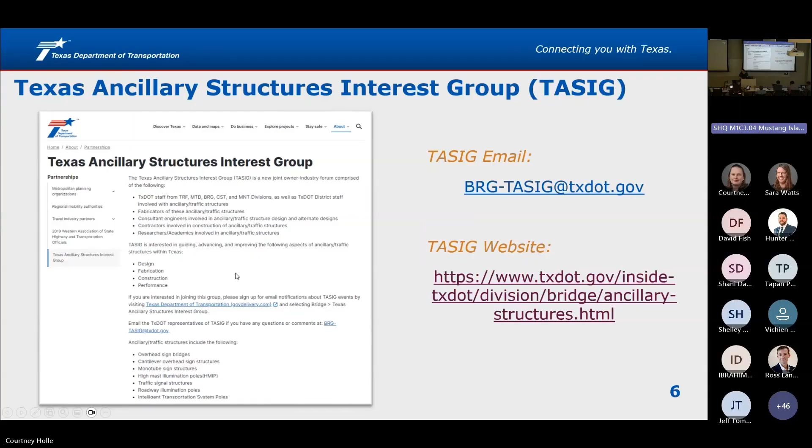Again, welcoming you, giving you some updates on where we are. We're going to go over research project updates - there was a lot of interest in that last year. I think seeing an annual progression of where we are and what we're looking at helps the industry as a whole.

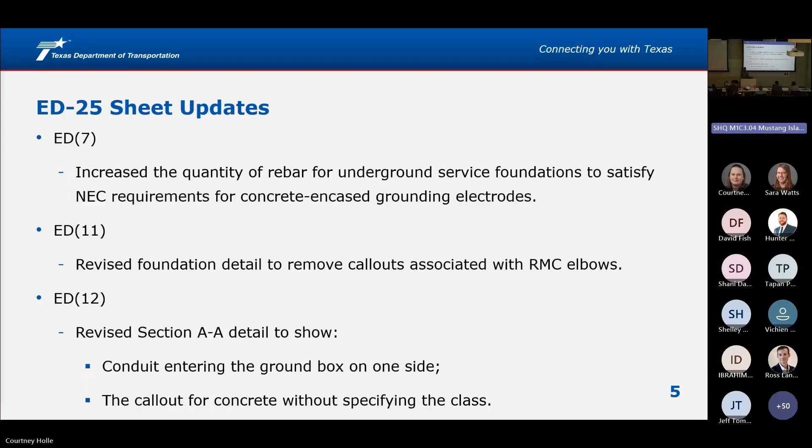There was one other minor update on the HMID sheets. Those sheets came out in 2024, so we gave an update to that last year. We had to basically put back what was in the HMIDs from '03—we had revised a weld in detail G.

Here's the whole sheet. I'm going to zoom into what we changed. On top it shows the detail, and I don't know what these welding symbols mean, but we moved the little arrow from the top to the bottom—correct, so we moved it back to what we had in '03.

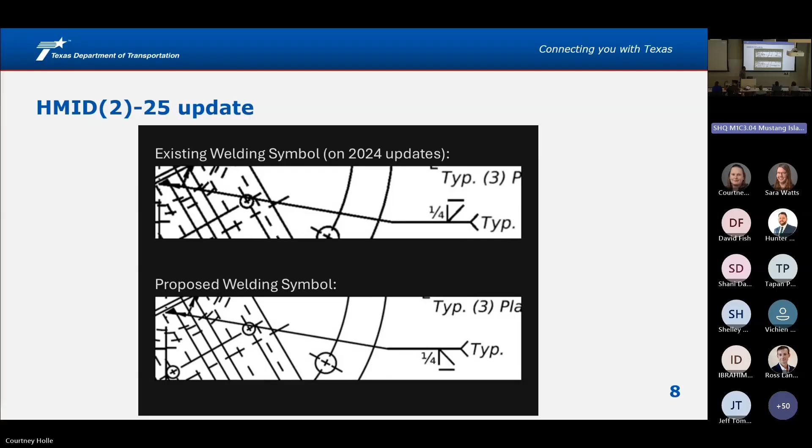And that's all the updates that I have, and then Greg's going to come give an update. Okay, so now we're going to go into bridges. These slides are going to look extremely familiar—they're the same slides from last year. We have made a lot of progress in developing some of these. What we have here is upcoming design specifications.

But standards take a lot of effort from a lot of different people. We go through a lot of different reviews because once we post them, we want to make sure that everyone's had time to look at it, comment on them, and there's been discussions. We don't want to put something out there that's going to surprise the industry, let's put it that way.

So you will see that some of our standards are still to the luminaire traffic signal signs support specification, otherwise known as LTS, the third edition, which is from 1994. The HMIPs were updated for fatigue details and stuff like that, but we're formally through the design process, through the checking, we're at the sheets. So we're addressing the red lines and then internal review, and then it'll go out for industry review.

And it'll be industry review, 95%, take two. So they were sent out and then we got feedback from the industry, and it took us some time to incorporate that feedback. So we are on our way there.

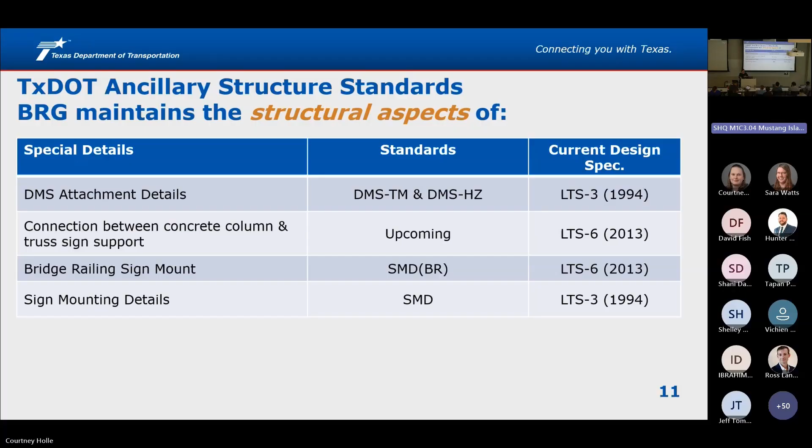So that kind of gives you an idea of where we are, where we're going as far as our standards are concerned. And then with that, I will pass it off to Mark for maintenance slides.

Okay, good morning, everyone. Yeah, Mark Johnson. I'm out of the maintenance division here at this campus.

I work with MMS data. If you're not familiar, basically we take in data for all the activities we do in maintenance, both through in-house crews, TxDOT folks with the orange shirts on, and through routine maintenance contracts. We try to consolidate that data.

We really put in significant efforts to QC that data every year so we can come back and say exactly how much money is being spent on various different activities, as well as quantities of activities, whether it's how many trees we've cut down or how many potholes we patched or how many bridge joints that we have sealed, all those types of things. We try to really put in a lot of effort to get that data to be correct.

So I want to show you a few things from the side of maintenance, since this topic always comes up. Talk a little bit about what our data shows in terms of structures and also in terms of our budget. So these numbers at the bottom, when you see 732, 742, like when I came up through the agency, I was very familiar with the TxDOT spec book.

Then I came to maintenance and found out that they have a whole different system of tracking these activities, which was largely confusing. My first thought was, only the government could make this complicated. But these are actual numbers that we use in maintenance for tracking activities. There's thousands of spec items and bid codes.

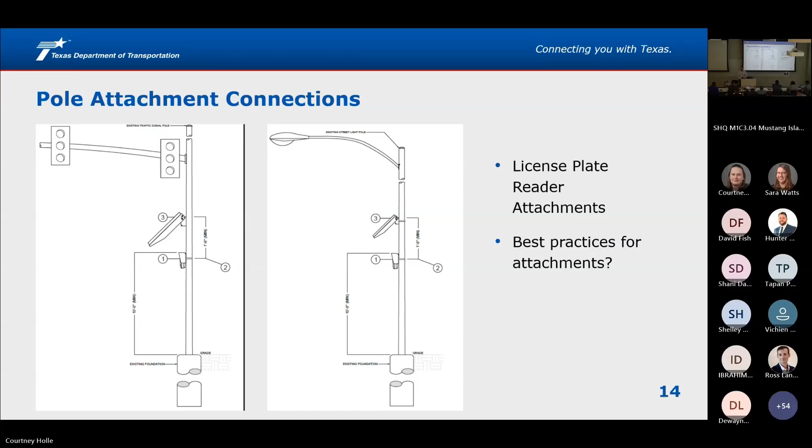All right, my name is Greg Jones. I'm with the Traffic Division, in the Traffic Engineering section - I handle lighting and electrical things. And also I'm the project manager for a consultant contract, a statewide contract to inventory and inspect ancillary structures. It's a 5-year contract.

We started this back in 2020, and at the time we had no statewide records of large traffic structures. We have all these structures, but we didn't know where they were, how many we had, or what condition they were in. So in 2020 we got a contract with Michael Baker International for inventory, inspection, and creating a database. They've gone out and inventoried structures with LiDAR, and they can get a lot of good information with the LiDAR - heights, number of sides, all kinds of stuff.

And then they're inspecting the ancillary structures, and just due to costs, we've been inspecting only a sampling of structures. We don't have the funds to inspect everything, but we're getting a good idea of what's out there, and putting everything in an ArcGIS database. The contract is set up so we can inspect high mast poles, overhead sign structures, ITS poles, and signals. For this contract, we focused on high mast poles and overhead sign structures.

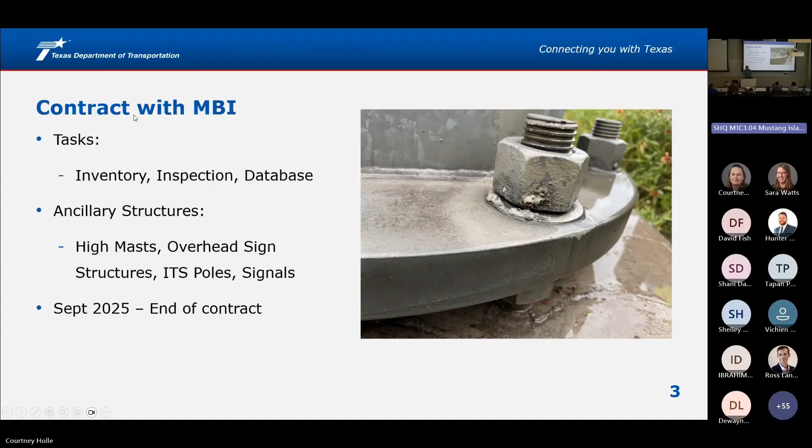It's a 5-year contract, and the end of the contract is just next month, so we're pretty much at the point of getting our final data into the database. For the high mast poles, this year we completed our high mast inventory. We don't have the data for those central West Texas districts posted yet, but overall we have over 6,000 high mast poles, and through our inspection we inspected about a fourth of those.

Overhead sign structures - let me see. Oops, what happened? Here we go. Yeah, I like that video. So in 2022, that sign on US 75 in North Texas fell over, and it was a base plate weld failure.

So MTD division got on that, and they set up an in-house inspection of anchor bolts of cantilever overhead sign structures. Basically it was all TxDOT inspections, and they were just supposed to count how many had loose nuts on them. They also got with us, and we added overhead sign structures to our inventory and inspection, focusing on Fort Worth and Dallas districts, since that's where we had those failures.

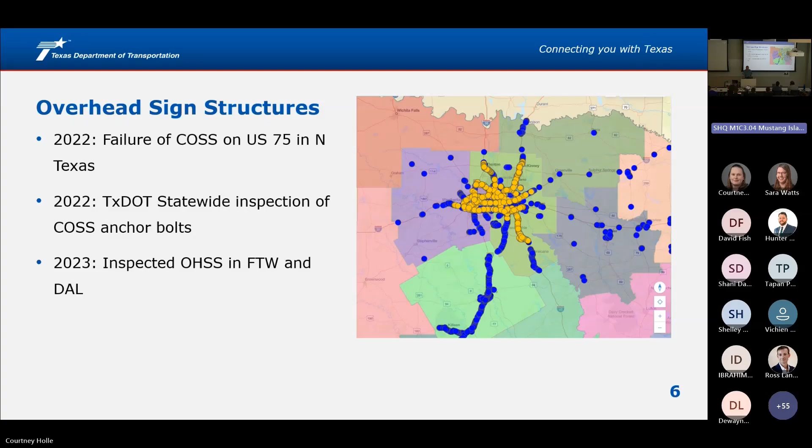Then in 2024 we completed our statewide inventory of overhead sign structures - we still need to fill in some data, but we have most of it. Houston data will be in there pretty soon. Also in 2025, on MTD's suggestion, we did non-destructive testing in Fort Worth and Dallas of cantilever overhead sign structures, testing the base plate weld to see if there were any cracks. The thought was that if there were loose nuts, maybe that contributed to the failure of the base plate weld. So we inspected structures with at least two loose nuts in the Fort Worth and Dallas area.

Overall we inspected 87 of those structures with loose nuts, and 15 of them had cracks in the weld to the base plate.

So that's kind of an example of one that they found. The cracks are usually 1 to 3 inches long, with 1 to 5 cracks in the base plate.

We just got that information about a couple of months ago, so we've notified the districts to evaluate. I'm sure some of those have probably been taken down, but I don't have all the information on that yet. In the past, when we found structures with major deficiencies, the districts usually just take them down.

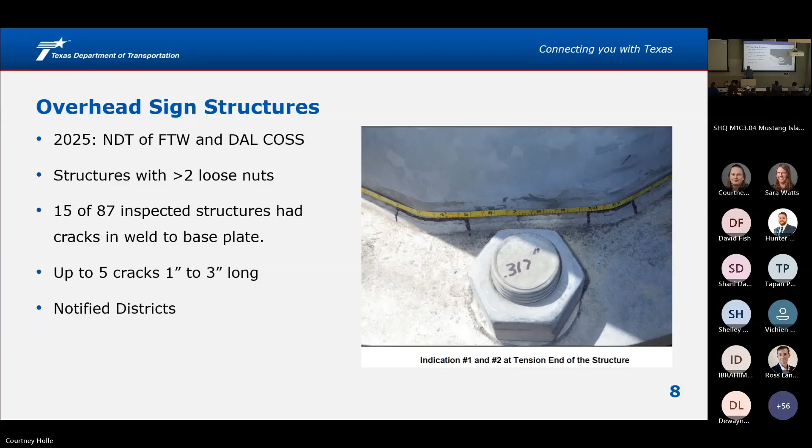The other part of our contract is the GIS database. It's in ArcGIS Online, and it is now on the TxDOT ArcGIS Online system. We're still getting all the data into it and making sure all the functionality is there. It's mostly working, but anyone in TxDOT can have access to this database—just get an account through the service desk and join the group TxDOT HMIP and COSS inspection reporting. I think this will be pretty handy for the districts in maintaining their equipment.

This contract is over in September. I'm planning on getting a new one going this next fiscal year to hopefully start in 2027. We'll be adding new construction that's been done since the last round, so we'll do more inspections, and we may add other structure types. Since I'll be getting the scope together, if anyone has suggestions on what other structure types to look at—maybe traffic signals—just get with me on that.

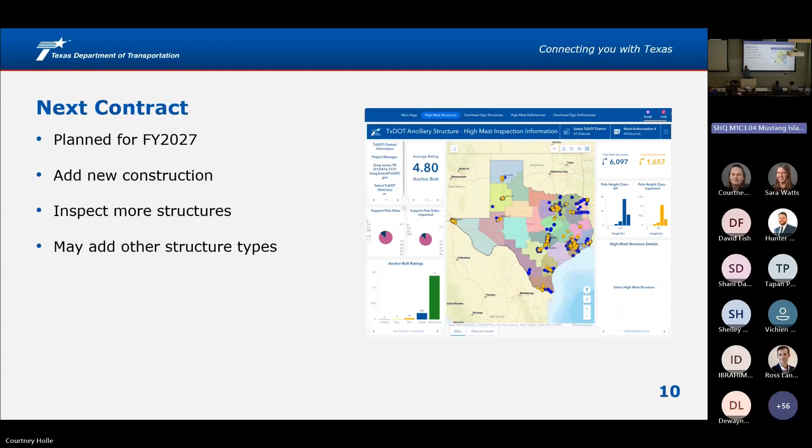We're 2 years in on a study. We've got 1 year left, and we've been doing a whole bunch of work. We'll kind of see a little bit of an overview of what we're doing, and hopefully get some good feedback today.

As I mentioned, it's a joint study between UT Austin and A&M, and we've got lots and lots of people working on here. When we look at the UT folks that are on here, you can see the students and postdocs that are doing all the heavy lifting and so on.

This is UT Austin. My good friend Stefan from A&M likes to call us TU, which is kind of humbling—to have a competing university refer to you as the university and actually have an acronym for that.

But anyway, so this is our group that we've got, and we're going to have the speakers going on here, and the folks we have at A&M are listed on this slide here.

It's been a really good project from the perspective—we've had a few different projects where we've had joint studies between UT and A&M, and it's been a really good team. We work together really, really well. I think you'll kind of see as we go through and the students speak a little bit today that there's been good collaboration between the groups, and good communication and so on that we've had.

As you're going to see as we go through the project today, we're providing an overview of everything that we've been doing up to this stage, including trying to look at cracks that happen in the welds at the base plates of these different types of structures, and then trying to come up with repair techniques.

When you start thinking about what's in the field, those structural elements see continual cycles that vary in amplitude. In the laboratory, we always do things like constant amplitude tests, and you try to say, well, we did 10,000 cycles or 30,000 cycles, but that doesn't mean much to you physically. So we're going to walk through everything we've been doing, our test results, and try to give you an indication of what this would mean from a performance perspective for the repair techniques in the field, from a timing standpoint and things like that.

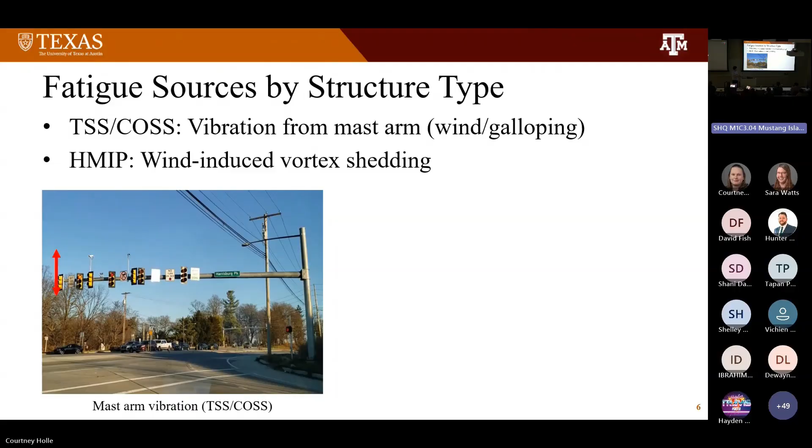Previous studies reported that the main source of fatigue damage of TSS and COSS is repetitive vibration of the mast arm. For HMIP, the main source of fatigue damage has been identified as vortex shedding from wind.

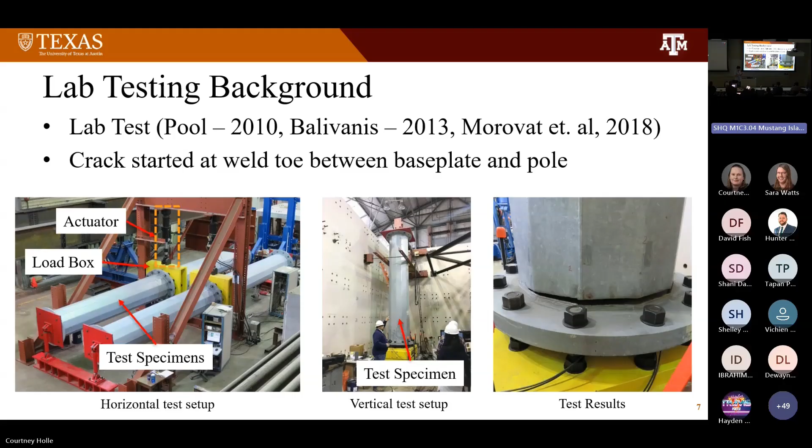To investigate this loading scenario under controlled conditions, many researchers have conducted experimental tests. Typically, this experimental test involves connecting test specimens to a load box and then applying cyclic loading through an actuator. These results consistently show that fatigue cracks occur at the weld toe between the base plate and the pole and lead to brittle fracture.

Some researchers have also focused on the galvanizing process, which can introduce thermal stress. Research shows that a high level of concentration occurs at the weld toe during the galvanizing process and can cause a galvanizing crack, meaning the weld toe is a critical weak area even before the structure is put into service.

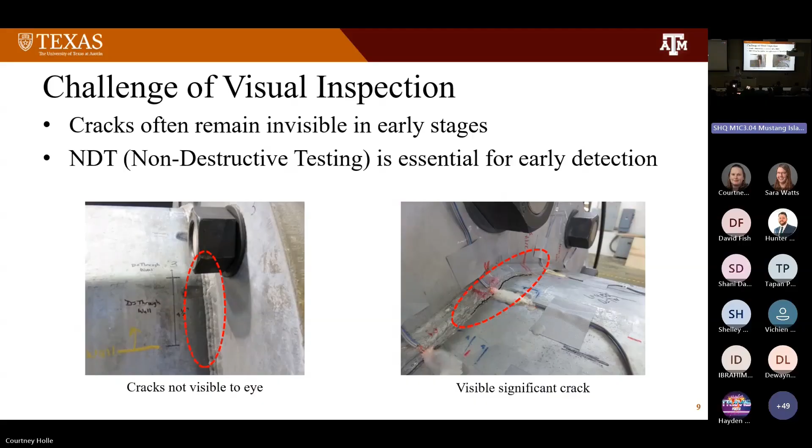For that, non-destructive testing, NDT, is essential. In this research, we primarily use phased array ultrasonic testing, PAUT, as a non-destructive testing method. This technique uses a probe that emits ultrasonic waves, and when ultrasonic waves encounter a crack, part of the wave reflects back. That signal is captured and visualized.

After identifying the crack's location, we need to repair it. The previously proposed repair method involved identifying the crack's location, grinding the existing crack, and then restoring the section by rewelding.

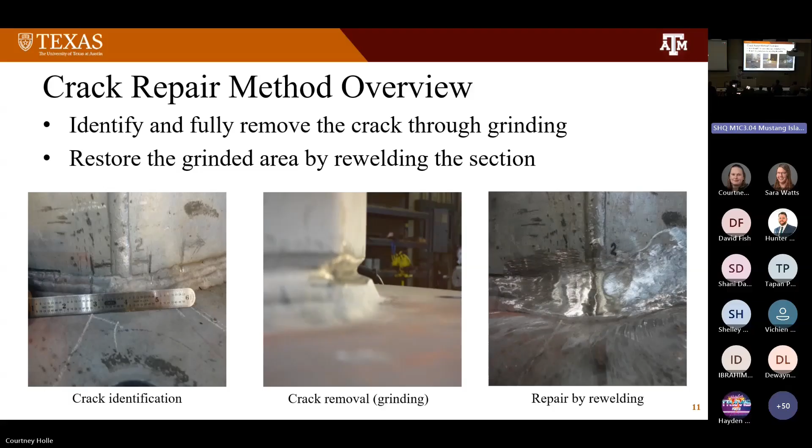The objective of this research can be summarized in three main parts. First, conducting field assessment using PAUT in various regions across Texas to confirm that cracks are detectable using PAUT and located at the weld toe. Second, conducting lab tests to induce fatigue cracks and then repair them, evaluating the performance of the repair techniques. Finally, we aim to provide practical recommendations for monitoring, repairing, and potential replacement for these types of structures.

So let's move on to the field assessment. We inspected poles in 4 different regions across Texas: Austin, Bryan, Dallas, and Houston. A total of 120 poles were inspected, 40 for each type of structure.

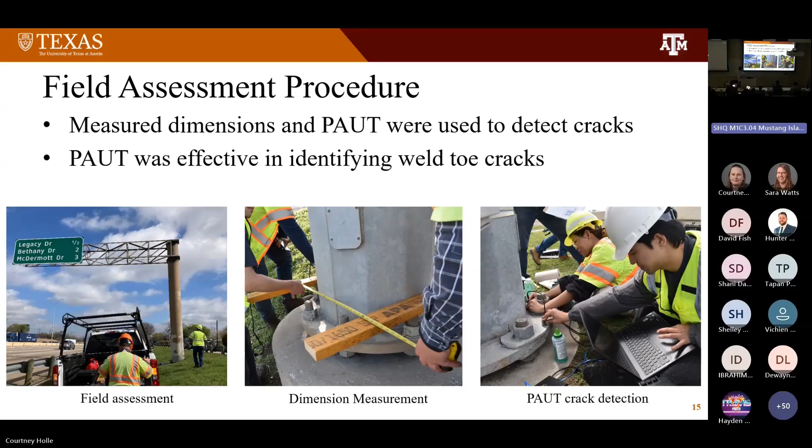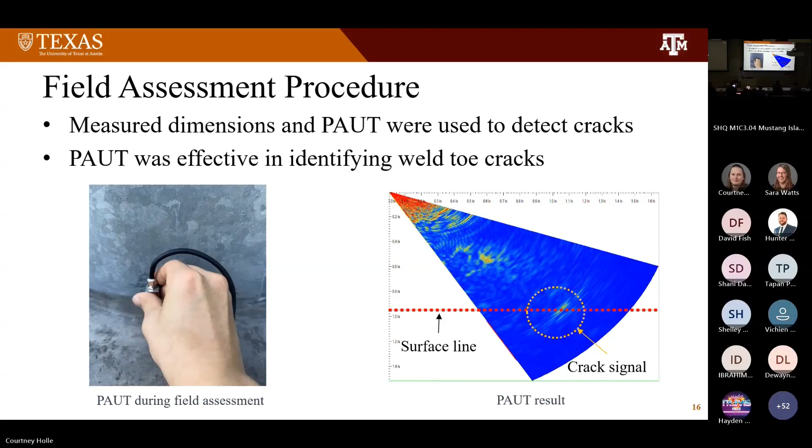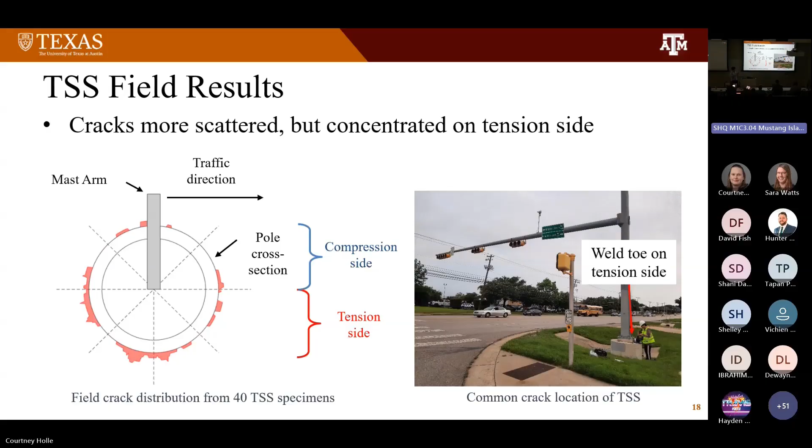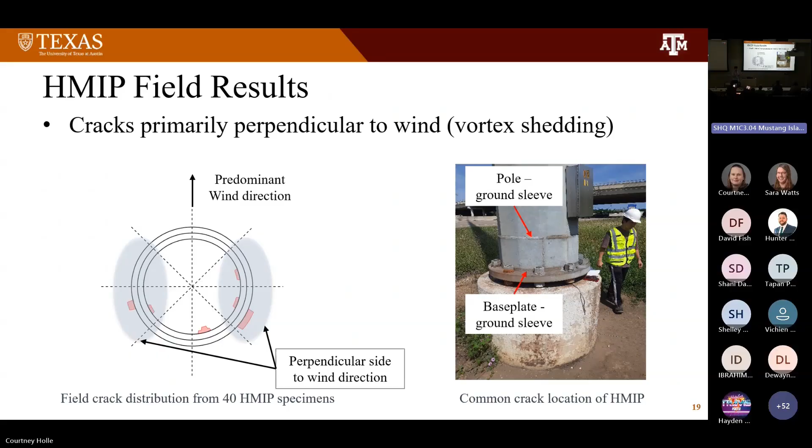Cracks located between the base plate and the ground sleeve were marked on the outside, and those between the pole and ground sleeve were marked inside. Overall, cracks tended to locate on the side perpendicular to the predominant wind direction, which supports the idea that vortex shedding is the primary reason for fatigue damage of HMIP.

The findings from field assessment are: for TSS and COSS, cracks mainly located on the tension side, and for HMIP, cracks mainly occur on the side perpendicular to the predominant wind direction. Now we know where the critical weak area is, so we can focus our monitoring more effectively.

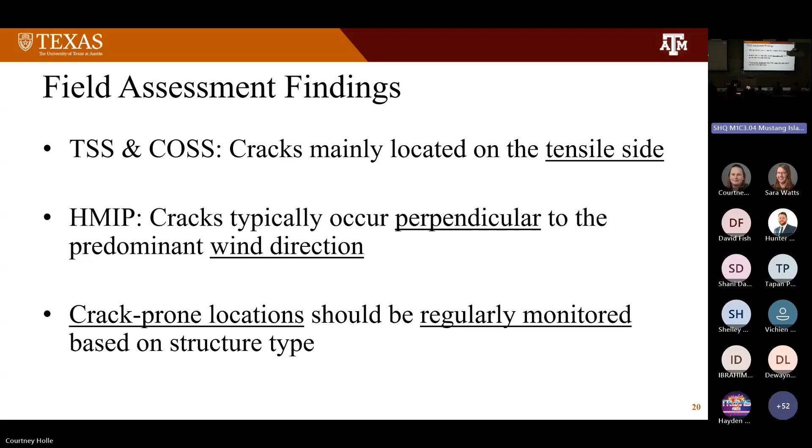Let's move on to the lab test setup. At UT, the experimental test was planned for HMIP and COSS, while Texas A&M is conducting testing for TSS. The test methodology is pretty similar, so I will describe the general test setup.

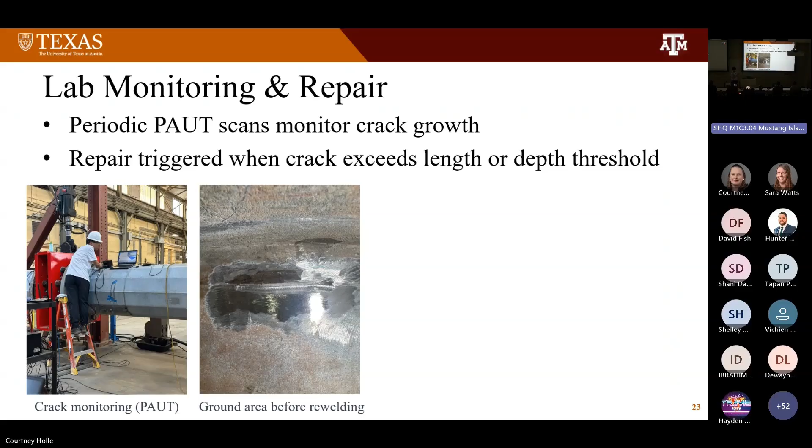Throughout the experimental test, we paused at designated intervals to inspect the test specimen using PAUT and measure the length and depth of the crack. If the crack exceeds a certain threshold, we repair it by grinding and rewelding.

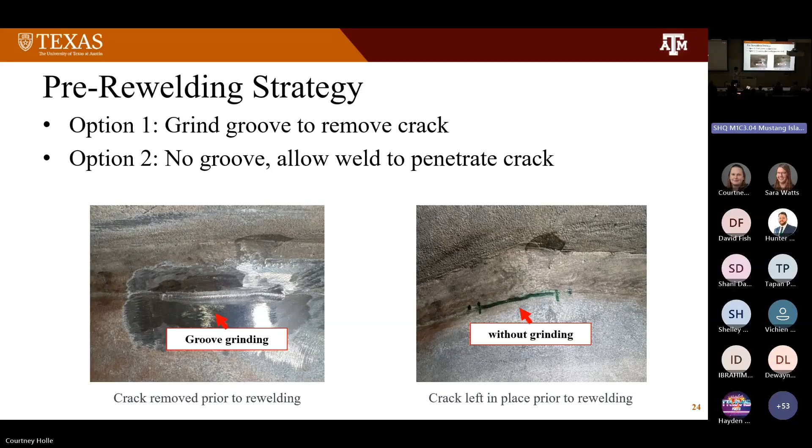Our repair stages fall into 2 main stages: first, the pre-rewelding stage, and second, the post-rewelding stage. In the pre-rewelding stage, one key decision is whether to grind the groove to remove the existing crack entirely, or just weld over the crack and allow weld material to penetrate into it.

In the post-rewelding stage, we consider different types of surface treatment. The first option was to leave the weld bead as is. The second option was to grind the weld toe slightly to reduce the stress concentration and prevent any unexpected undercut. Another option is to sand out the surface entirely to remove any irregularities. We are now comparing these methods to determine which has the best fatigue performance.

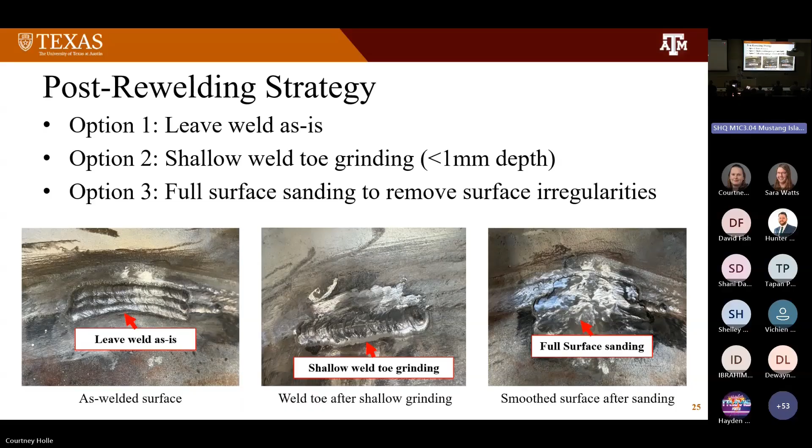So with that, I'll hand it over to Xiu Chen, who will present the results. Thank you, Jung-Ho. I'm Xiu Chen, a UT graduate student on this project, and I will share some of our current results.

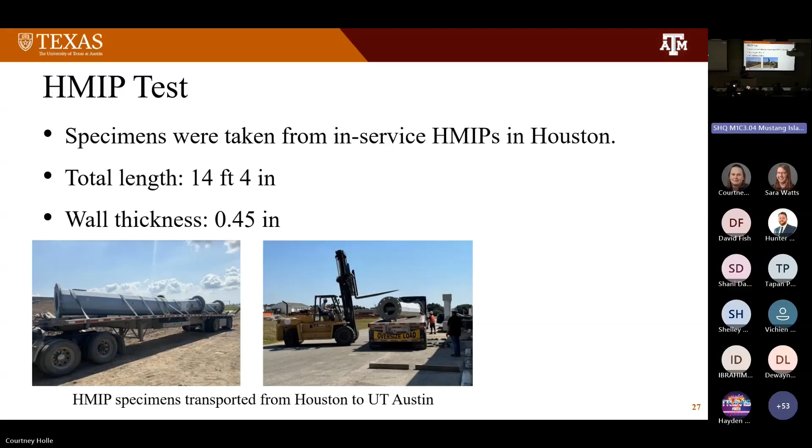For the HMIP test, we took all 4 of our specimens from in-service HMIPs in Houston. We took them down and cut 14 feet from the base plate upward, and then they were transported to Austin, where the flange plates were welded on, and then mounted on our test setup.

We used a 12-sided HMIP specimen. The diameter of the base plate is about 49 inches, and the wall thickness is about 0.45 inches. In the lab test setup, we applied a stress range of 7 KSI with a controlling amplitude of 0.19 inches at a loading frequency of 1.25 hertz.

For comparison, field data of an in-service HMIP in Austin shows an effective stress range of only 0.6 KSI, amplitude of 0.01 inches at the same height, and 26.5 thousand cycles per day.

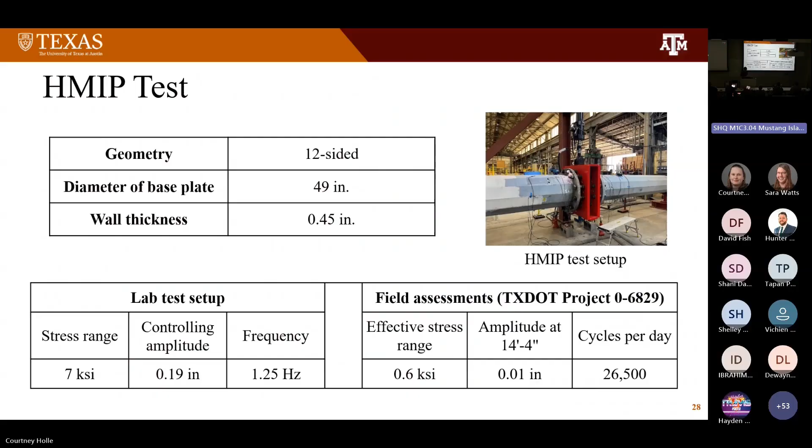This slide shows how we convert our lab data to field performance using an SN curve. The SN curve on the right shows the relationship between stress range and number of vortex cycles. The x-axis represents the number of vortex cycles, and the y-axis represents the stress range. These different lines represent the different detail categories from the AASHTO vortex design curve.

Here we can see that as the stress range decreases, the number of vortex cycles increases. The equation on the left from the SN curve shows the number of cycles is related to the stress range to the third power. So in our case...

Our lab test applies a stress range of 7 KSI divided by the effective stress range in the field of 0.6 KSI, cubed, and the result times the number of cycles in the lab equals the number of cycles in the field. This number of cycles in the field divided by cycles per day equals the duration of HMIP service in the field.

From the calculations, 10,000 cycles in the lab, or 2.5 hours of testing, is equivalent to approximately 1.6 years of natural wind loading on an in-service HMIP in Austin.

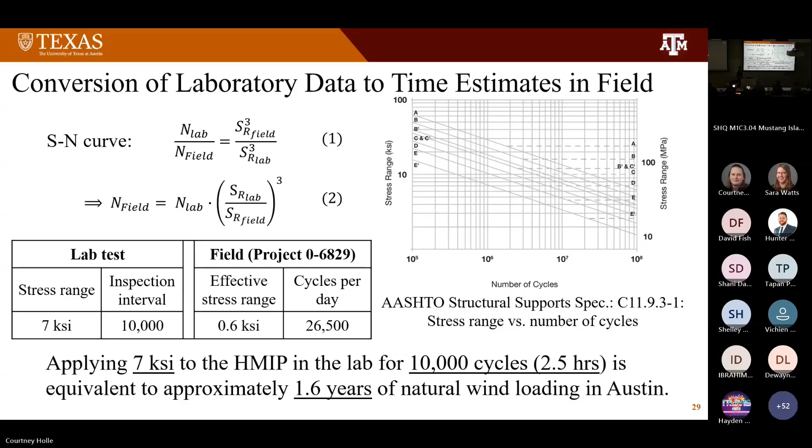I'd like to share some of our results regarding the HMIP test and repair. We focused our test on 2 poles, 6 bands. However, most of them have undergone only 1 repair. The East HMIP band 2 has undergone 5 repairs, which allows us to show the effectiveness of each repair attempt.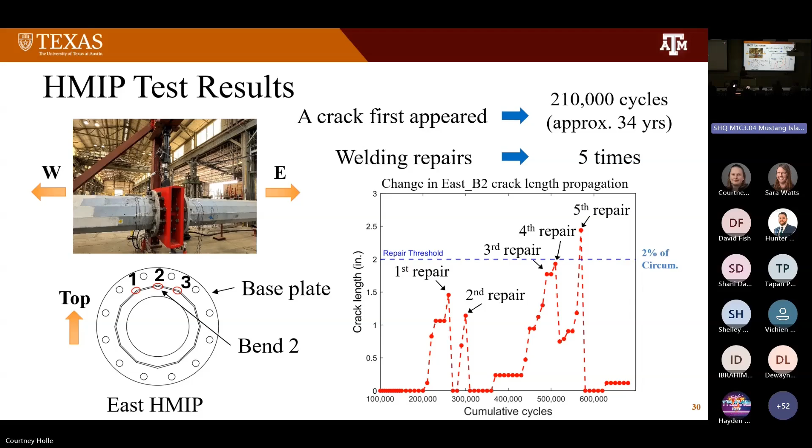For the first 2 repairs, welds were made immediately upon rapid crack growth. After several attempts, we set our repair threshold at 2% of circumference. This location has been repaired, and the crack reappeared a total of 5 times. The first repair was performed 50,000 cycles after cracking, with the crack depth measured at 0.1 inches.

Our repair involved grinding out the crack and applying 3 weld passes, 1 at the bottom and 2 cover passes above it. However, just 20,000 cycles after the first repair, a new crack reappeared between the 2 cover passes. So the second repair was performed 40,000 cycles after the first.

This time, the measured crack had reached 0.05 inches, located between the two cover passes. This time, we ground out the weld and the crack along with the previous weld, and applied 5 weld passes, 2 fill passes at the bottom and 3 cover passes above them, to distribute the potential stress concentrations.

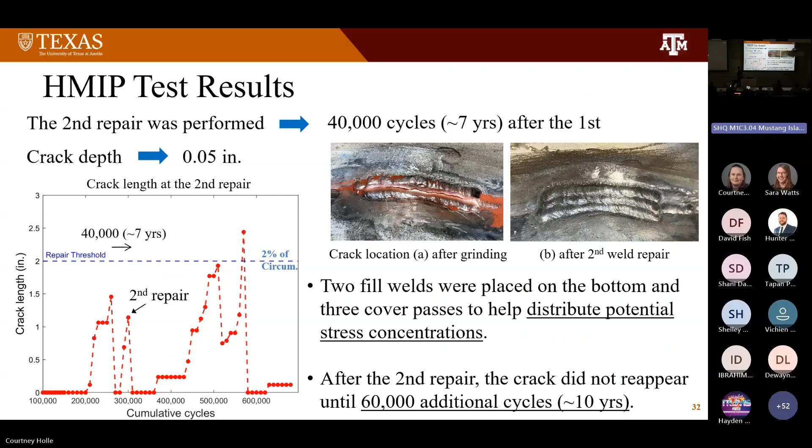After this repair, the crack didn't show up for quite a while. Eventually it did, though the growth was relatively slow. The third and fourth repairs were performed within a short interval. The main goal for the third repair was to see if a relatively shallow crack, like depth of 0.05 or 0.1 inches, could be repaired by direct welding without grinding.

The result wasn't ideal. The crack was merely covered and soon penetrated through the cover passes and reappeared on the surface. So we decided to conduct the fourth repair just 30,000 cycles after the third.

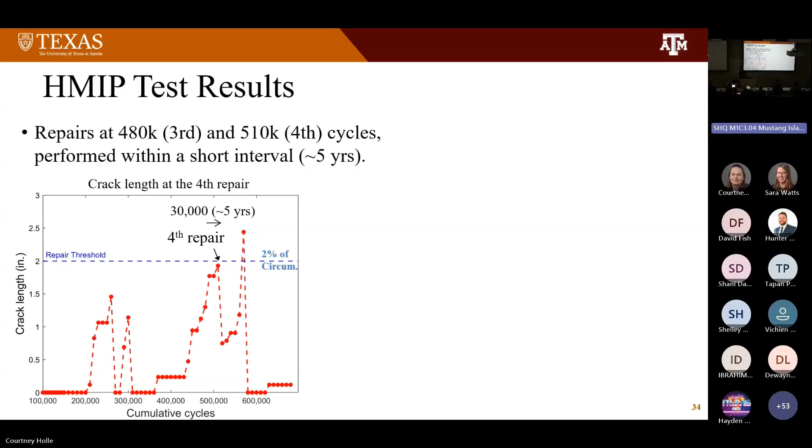What set this repair apart from the earlier ones is that we sanded the weld surface after welding to minimize stress concentrations. Since the metal in this location had undergone considerable fatigue, the new crack reappeared shortly after.

So next, we decided to perform the fifth repair. It was taken 60,000 cycles after the fourth, and this time the crack was really deep, with a depth of 5/16 inches.

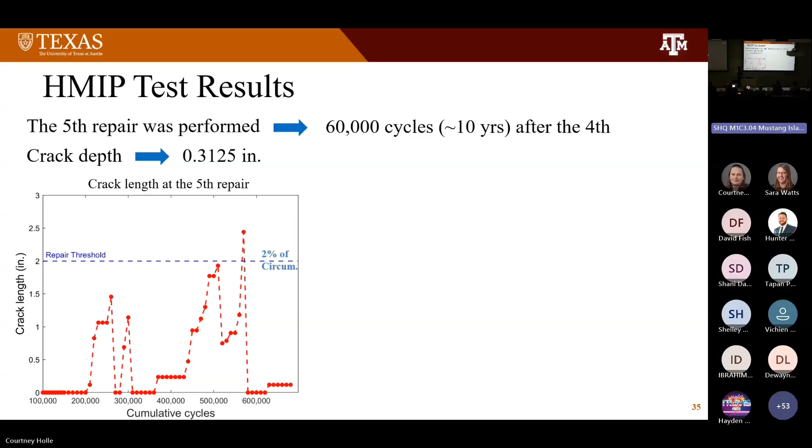We used the same grinding and sanding method as the fourth repair, and this time applied a total of 9 weld passes: 1 fill pass at the bottom to fill the crack tip, two fill passes in the middle, and 2 more layers above them, each with 3 weld passes. This repair has been relatively effective so far.

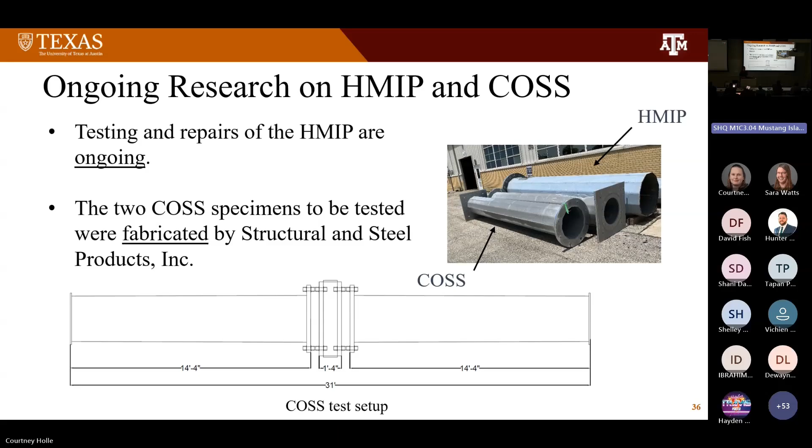Eventually, a new crack appeared, but it remains small and stable. Our test and repair on HMIP are still ongoing and moving forward. We have 2 COSS specimens to be tested, which were fabricated by Structural and Steel Products, and they will be connected to a load box at the bottom. We will examine crack initiations and repair in this setup as well. We also conducted some tests and repairs on TSS. Hangul will be presenting some of these details.

We tested side 1 first with a stress range of 15 KSI, and found that the crack propagated very fast under this stress. So we wanted to decrease it to 10 KSI when we started testing other sides. We also set the loading stress and frequency based on the stress range.

During the test, we performed inspection every 2,000 cycles using visual inspection and PAUT. We used acetone for the visual inspection. While the pole is under cyclic loading, we apply acetone and check if it is seeping into or out of the crack openings. We also use PAUT, and a sample of the results is shown on the right side.

Based on the inspection results, we could plot crack depths and crack lengths against the number of cycles. The left plot shows the crack depth as a percentage of wall thickness, measured by PAUT. The right plot shows the crack length in inches, measured by visual inspection using acetone. It also has a blue dashed line representing the repair threshold, which is 2% of the circumference for the crack length. When the crack length exceeded this threshold, we wanted to start repairing.

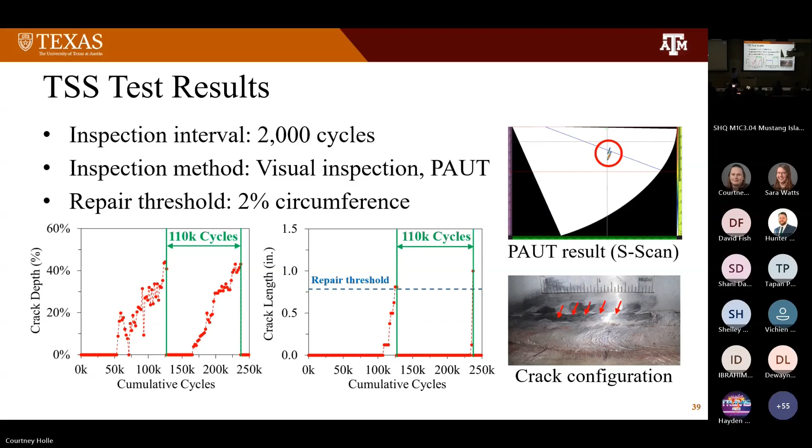Before we start the repairing process, we wanted to double check the crack location by doing a dye penetration test. It is one of the non-destructive testing methods, so we spray the visible dye, letting it penetrate into the surface defect, and based on the penetrated dye, we can check the crack location as shown on the picture.

After this, we ground and grooved the location, then welded it. The repairing followed this procedure, which has been developed by cooperation of two institutions.

After some tests, we could get this result. The plot is showing life in terms of years on its y-axis, converted using the same method that Xiu-Chan explained in the previous slide. In the x-axis, these present the crack locations as explained on the right side. M1 to M5 are the crack locations on the multi-sided pole, and R1 to R3 are for the round pole.

In the plot we have two types of sections. The hatched section represents the pre-repair life, from the start of the test until the occurrence of the first critical crack on the connection, on the weld. The clear section represents the post-repair life, from the moment of repair until the occurrence of the second critical crack on the connection.

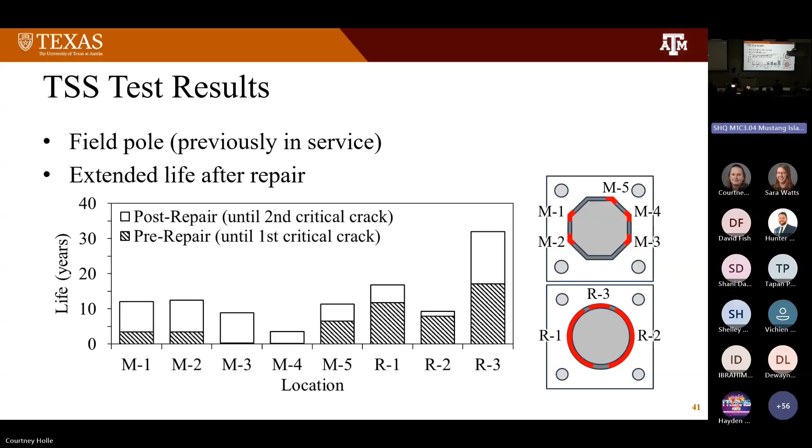About the clear sections, the post-repair life, you may see variation from 1 to 15 years, largely due to differences in welding parameters in the repair process. At the time, we were refining our welding techniques, including welding speed, welding rods, and welding amperes, to achieve a consistent result. But even with this variation, it's clear that repair can extend the fatigue life.

This is what we found from the experimental test so far. We found that the multi-sided pole has fatigue cracks initiated from the bend, and we also confirmed that repair can extend the fatigue life. From the traffic signal poles test, we found that the round pole could have better fatigue performance than the multi-sided pole.

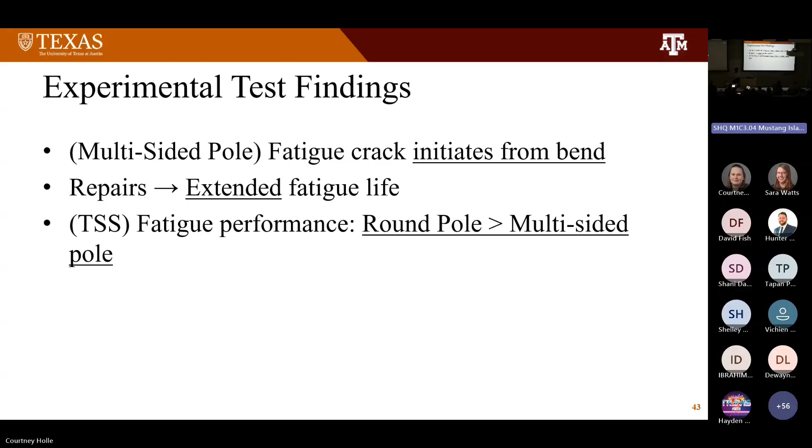So far I presented the test results, and now let me present the conclusion and future work. This is the conclusion we've reached over the last two years of the project.

From the field assessment, we found that traffic signal poles and COSS structures commonly have fatigue cracks on the tension side. For the HMIP, we found that fatigue cracks commonly occur perpendicular to the predominant wind direction. From experimental tests, we found that multi-sided poles have fatigue cracks initiated from the bend, and we confirmed that repair can extend the fatigue life of the pole.

This is the future work we want to complete in the next year: complete the experimental test, develop a certification method for inspectors, and finalize guidance on crack mitigation, repair, or replacement. To do so, we want to identify the effective repairing method and the optimal repairing timing.

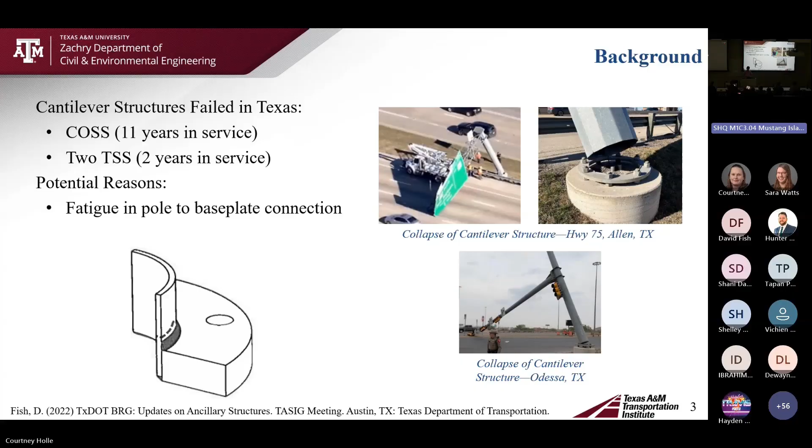There was an industry advisor group meeting in spring 2024 to discuss what good methods would be to tackle this problem. Six design alternates were discussed, three that were agreed upon and three that were disagreed with. The first one is really just the control, leaving everything as it is.

Then there was the fail-safe system, which we'll discuss what that really means. It would ensure structural integrity, and we believe would prevent any fatigue failure of the structure at all.

The structural fatigue improvement is really just what it looks like to leave the overall design the same but maybe change some little parameters, like the thickness of various things, and see how that would increase the fatigue life. However, ground sleeves, welded stiffeners, and improvement of the welds were not agreed upon during the industry advisor group meeting.

So the objectives we're going to discuss in this presentation include creating a targeted testing program to isolate critical design parameters. There are a thousand different parameters you could change for a COSS structure, but we're seeking to identify the most critical ones, and hopefully provide recommendations for future connection design based on fatigue provisions.

It was mentioned earlier that a lot of these COSS structures' design tables were maybe designed based on 1994 standards, and there are fatigue provisions that may just not have been around at that point. So we're hoping to get fatigue into those designs, as well as discuss our progress in developing the database of COSS.

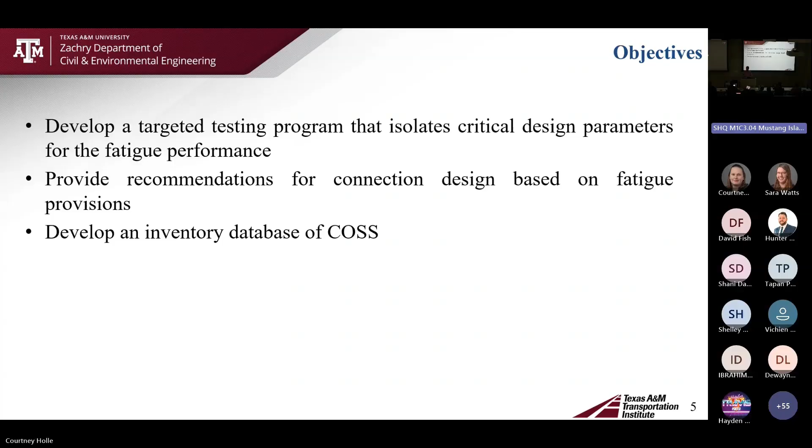Fatigue occurs when you have tension and cyclic loading, but if you put everything into compression, you eliminate all tension and therefore eliminate all potential fatigue damage. So you should theoretically remove all fatigue failures.

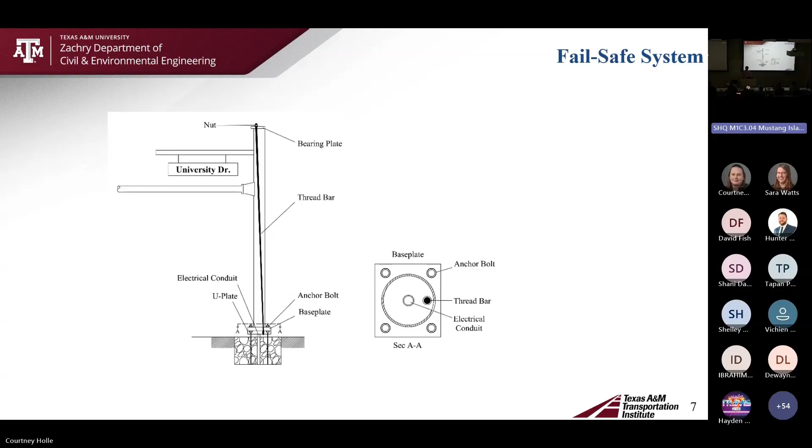Here's what it would look like on a structure-wide scale. You can see the top of the pole being eccentrically loaded connecting into the base plate.

We don't feel like changing the diameter of the pole is the most economical decision right now, so we're leaving that as is. And for constructability reasons, bringing the bolts closer to the pole doesn't seem reasonable, so the bolt circle ratio is also being left as it is. That leaves two important parameters: the thickness of the pole and the thickness of the base plate.

To demonstrate the importance of these factors, we'll look at the Dallas pole that failed as a case study.

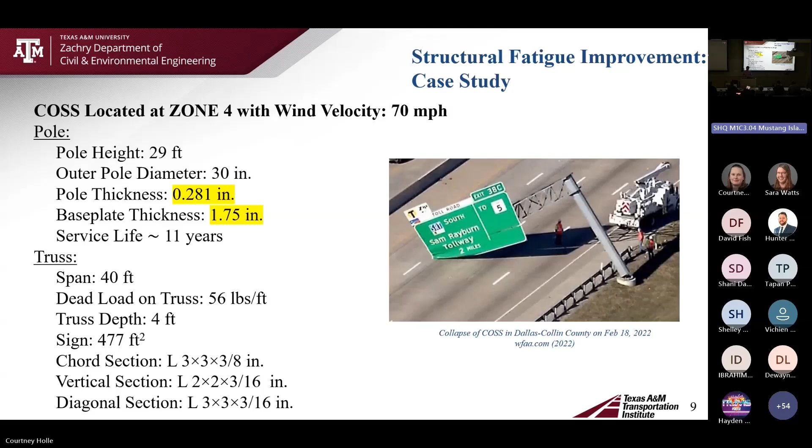On the left, we have a bunch of different parameters of this pole. We really want to highlight the pole thickness and the base plate thickness. In the design tables, the thinnest pole you can have is 1/4 of an inch, and this pole was just slightly thicker than that, a very thin pole. There was also a relatively thin base plate, with the thinnest base plate in current standards being 1.5 inches. So we wanted to look at what would happen if you were to shift these numbers a little bit.

Using the relative life equations from the previous presentation, we did some investigation. We found that if you were to increase the base plate thickness only by 1/4 of an inch to a 2-inch base plate thickness, and increase the thickness of the pole by just one size to 0.31 inches, you would nearly double the estimated life of the pole. Where it failed after 11 years, we estimate that you might have gotten 20 years of life out of it. So it's a relatively simple solution, just changing some existing parameters that can have a pretty large effect.

But as I mentioned before, we expect the fail-safe system might be a little bit more complex solution, but it should remove any fatigue issues that could potentially be experienced.

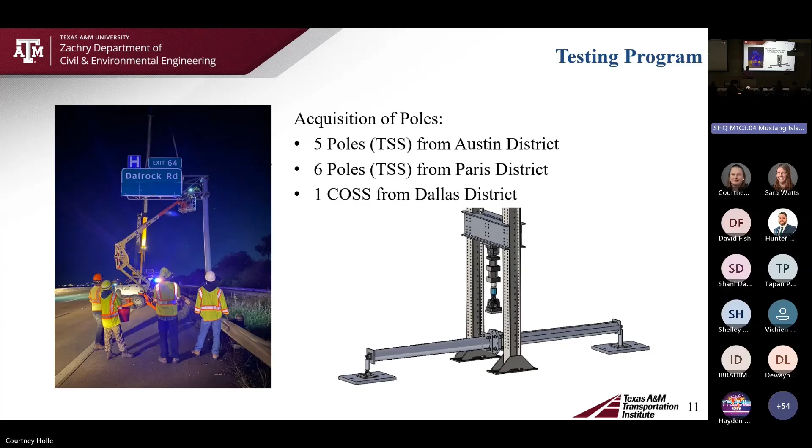Looking into our testing program, we've acquired 12 poles that have been in service, 11 TSS from Austin and Paris, and 1 COSS structure from the Dallas district. Our testing setup is identical to the previous project, as you can see pictured on the bottom right.

A little bit more detail on our test setup: we're not just investigating what kind of stresses we're getting in the pole, but we're also focusing on how the location within the pole affects the stresses, whether it be at the bend or in the middle of one of the flats of the pole.

Currently we're just testing poles, getting an idea of their fatigue life with our test setup, but eventually we're going to put one of our fail-safe system poles into the test setup and put our theory into practice, and hopefully see that there's no fatigue issues there.

Lastly, going into our COSS database, there's many different variables that we are recording in our database. We've got this information through various different means. As you can see in the picture, we're there making some field inspections. There's some poles that we did field inspections on.

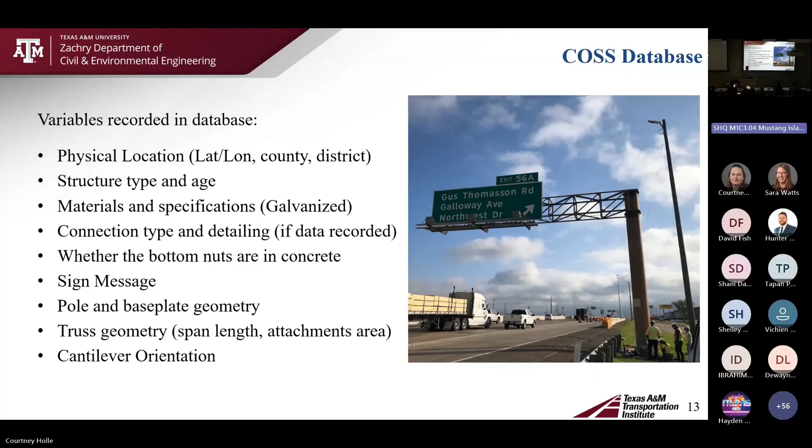There's some poles that we have TxDOT inspection records for. We got a lot of information from Google Earth and satellite imagery, and to fill in the holes of what we weren't able to find from satellite imagery, for pole thickness for example, we use TxDOT design tables.

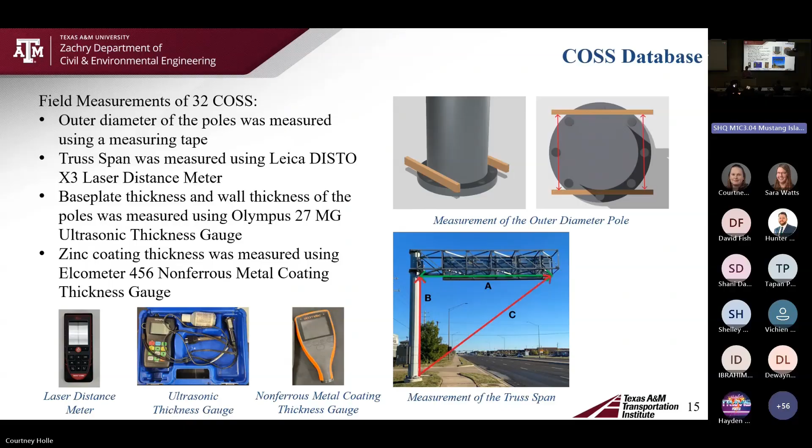If you're just pulling a bunch of information from Google Earth and satellite imagery, you probably want to verify it to make sure it's not a bunch of garbage. So these are the 32 COSS structures that we went out and identified. Here's just some methodology, some tools that we used. And then we also compared what we saw in the field versus what we got in our database.

While there's maybe a little bit of error, we found that what we were able to get through Google Earth and satellite imagery was actually pretty reliable, especially for what we're hoping to do, to really just identify risk with this database and gather information. So we found there was a pretty good correlation, and we were very pleased with it.

Here's just a little example of the massive information we might have in our database. This is just 2 poles. So we're gathering lots of information that hopefully can be easily transferred into ArcGIS for later use.

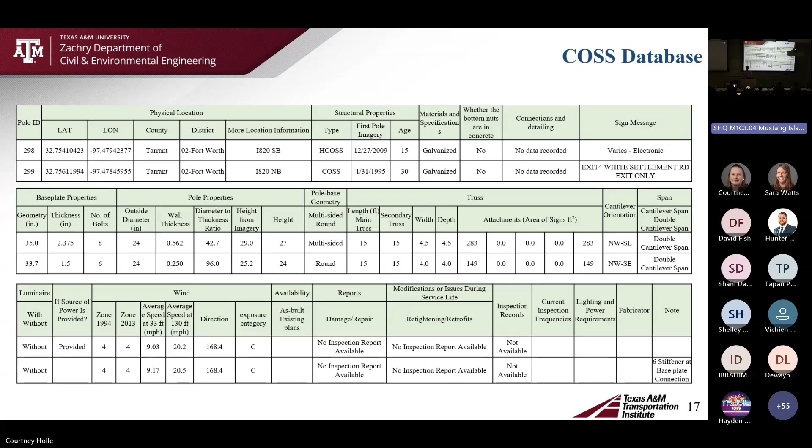For the sake of our database, we didn't pay attention to the ones with concrete poles so much, but we really just wanted to focus on metropolitan areas, as these are really the areas of high risk.

Not only do they have a lot more poles, but potential failures have a lot more consequences, whether it be risk to human life or economical dangers.

Some conclusions we have thus far in our project: through all of our calculations and design, the fail-safe system should drastically improve the structure's lifespan to being infinite as far as fatigue is concerned. The geometry of structures can be altered even by small amounts, a quarter of an inch, 3/100 of an inch in some places, to pretty drastically improve fatigue life. The high concentration of COSS structures in highly populated areas makes it really crucial to understand and improve the fatigue life of these structures.

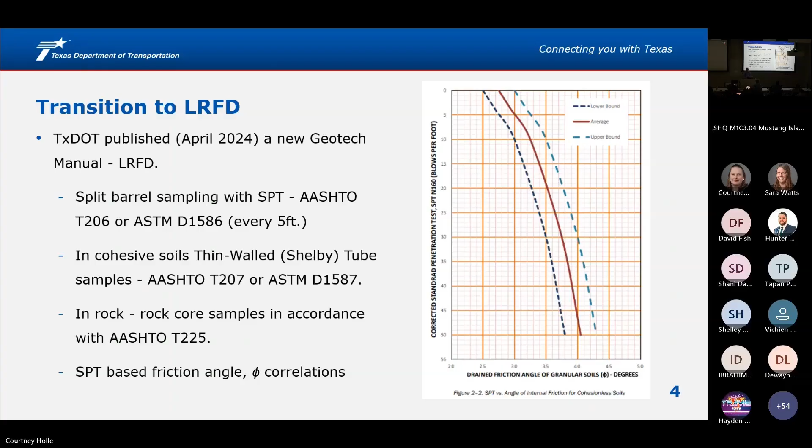What is the status of the foundations for ancillary structures? We're still using our current standards, which are still using TCP and are not based on LRFD. The TCP blow counts are also used to get correlations for friction angle and shear strengths. This mostly doesn't change since we rely on laboratory test results, either the UU test or the unconfined compression test.

So what is research project 7236 about then? Basically, the research is to develop standardized LRFD design methods for foundations of ancillary structures, project number 7236. That project started last year in September, so it's about a year now, and it will be completed August 31st, 2026. It's being done by Texas Tech University.

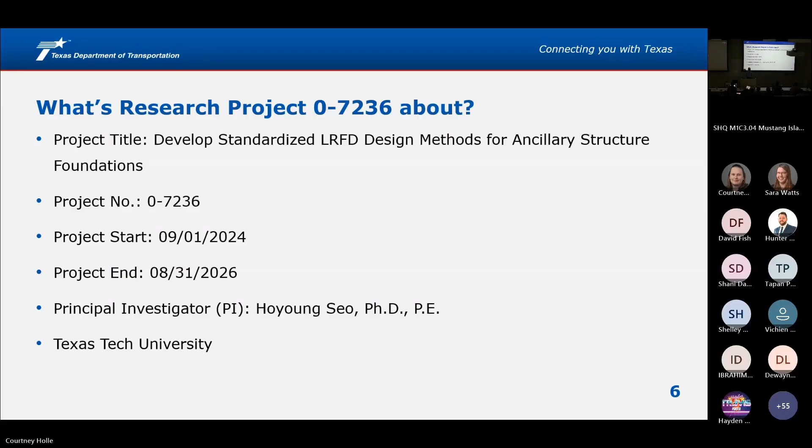What are the objectives of the task? Primarily, it's developing LRFD design methods for foundations of ancillary structures, compliant with AASHTO LRFD requirements. The other major thing is to update or replace the current standards we have for foundations of ancillary structures, again in accordance with AASHTO LRFD requirements.

So what is in the scope? Since I'm not part of the research team and got plugged in later, I may not be able to dig too deep into the research, but I'll present a high level overview. As part of the research, the team is doing a literature review on what limit states are considered for foundation design of ancillary structures. These are some limit states considered by various DOTs across the country.

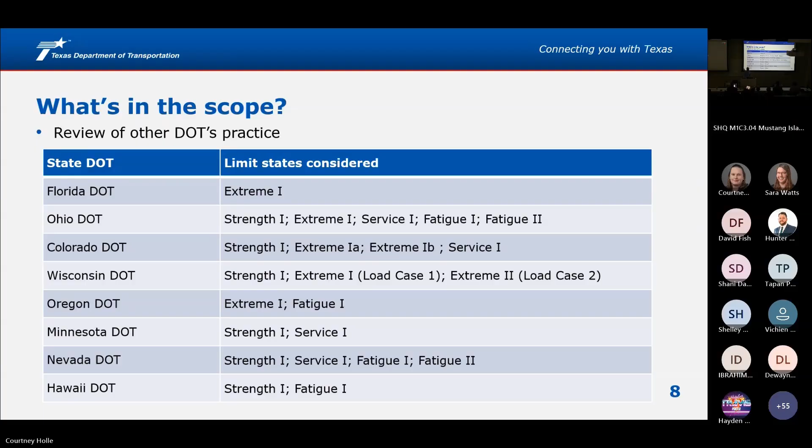We are also using P-Y curves if you've done foundation designs for lateral loads. Oregon DOT, for example, uses geotechnical fixity, or keeps increasing the depths until the deflection stabilizes—the top of shaft deflection. That's one of the things the research team is looking at in their literature review.

So what else is in the scope? One of the other things they're looking at is existing correlations. You may be familiar with this correlation—we also have it in Appendix 2 of our current geotech manual. When we have SPT and TCP data and occasionally want to convert one form to the other, we relied on this correlation, which is a result of a really old research project, but based on the data and analysis they've done, they're getting consistent results with it.

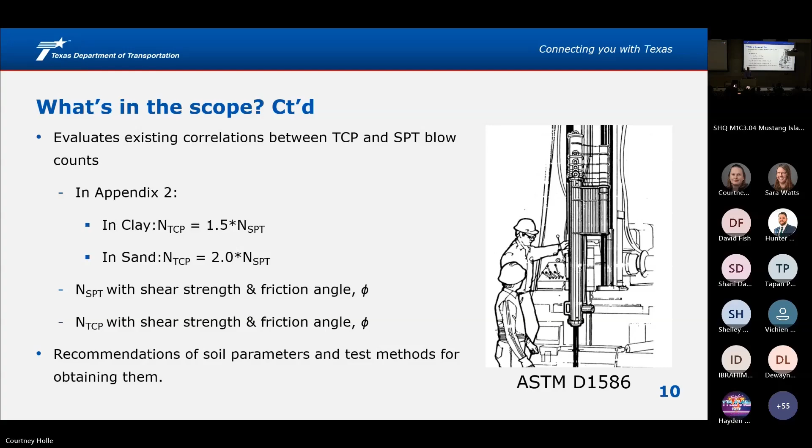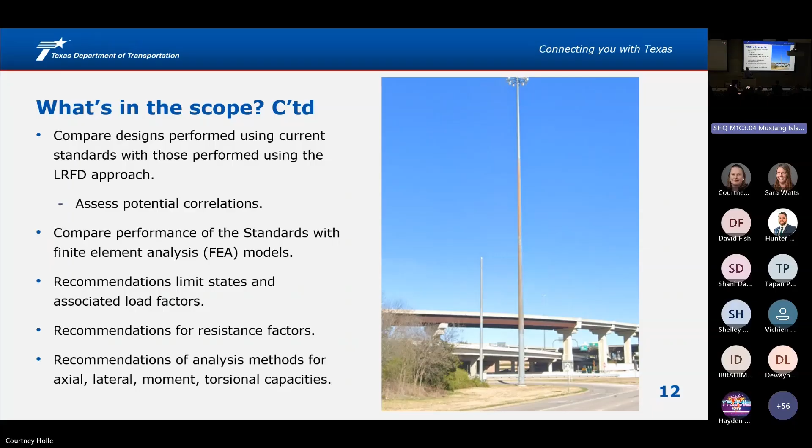The other aspect of the work includes comparing design's performance using the current standard with that of the LRFD approach, the new approach we're going to be following for these types of structures, and comparing the performance with finite element analysis methods or models. They will definitely be incorporating some of their findings with limit states, load factors for LRFD, and resistance factors, and also anticipate some commentary on analysis methods for axial, lateral, moment and torsional capacities.

This will take questions if you have any.

Good afternoon, everyone. It's a minute past 1. The room is definitely less crowded than it was this morning, which is fine.

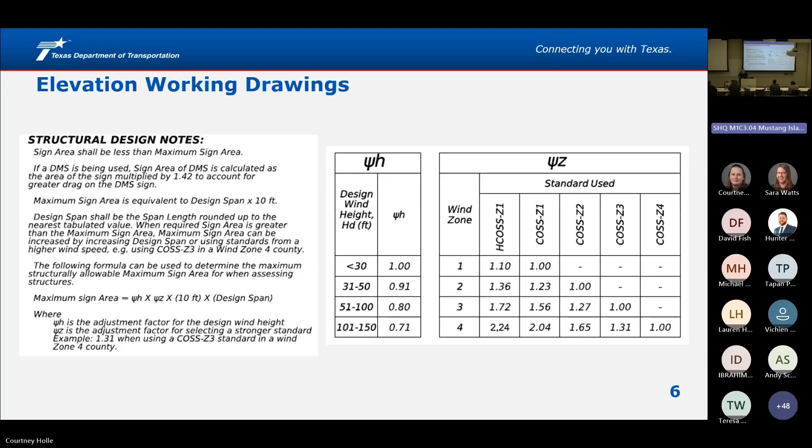We are trying to give you guys this guidance. This is what we've come up with as how we feel it would be most helpful: that you've got this working drawing for a cantilever structure, and you have these factors that you can use, and you can determine your max sign area, and you can determine what standard you're wanting to use for that.

So if you come back here, when you talk about, okay, which standard are you pulling this information from, right? You're determining it based off of what factor you need to get your maximum sign area above your actual sign area.

Okay, so I went into a lot of detail on this one. This is the only working drawing that has this much detail on it. We're still working on developing the other ones to have this guidance on there.

We do have the working drawings for a balanced cantilever as well. This is going to be mainly, we see this a lot with DMS signs. We do have a larger table for that one.

The examples that we have right now, and the guidance that we've been using, is for your truss members, you're going to be using your cantilever. So really it's half your span length for a balanced tee.

But when you do your tower pipe and your base plate connection and all that information, you're doing it for the actual span length, right? So typically this is 30 feet, and that's what you're basing your pole, your drilled shaft, your base plate connections on. And then your truss is based off your 15-foot cantilever.

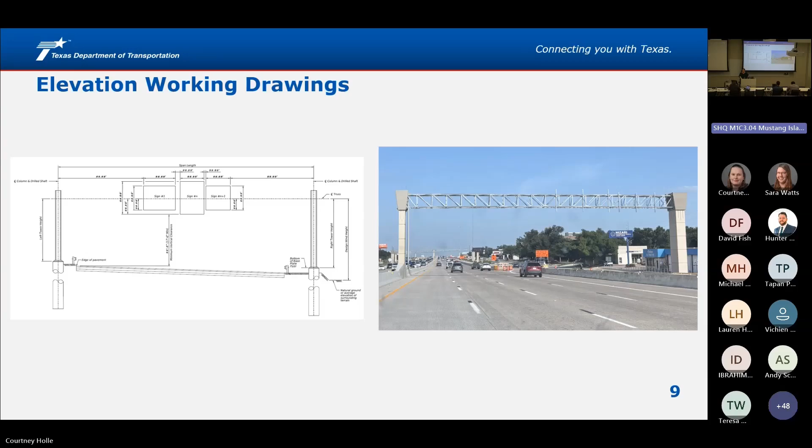All right, so we also have these for OSBs, the overhead sign bridges. Again, different sign areas, depths, same kind of concept. It's a design span, design height—you go into a table, you pull it. So it's the simplified table, right? And then for the OSB, where it's the cantilever on the end, we do currently have examples that walk you through how you're supposed to calculate where that splice actually is. As time goes on, the people who created these designs, these examples, and understood the basis for them and how to use them, they're not necessarily around. We've got other people coming in and they aren't necessarily getting interpreted the way the intent was at the beginning.

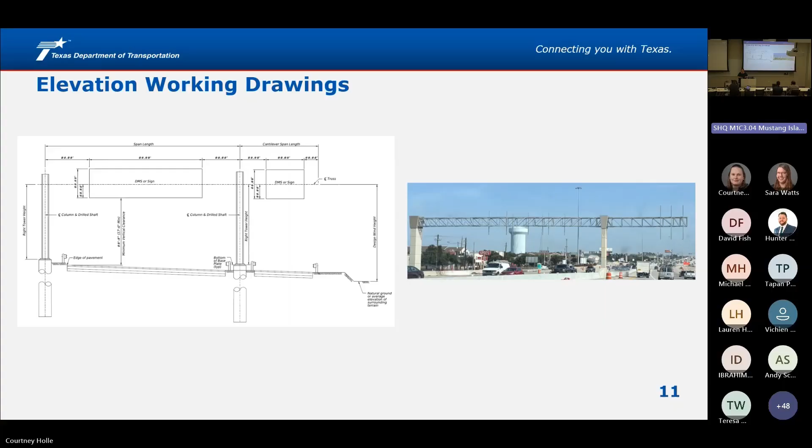So we're trying to clarify this by having the engineer, if they are using different spans throughout the tables and pulling information, put all the information on the working drawing elevation. This is going to help the fabricator too, right? There's a lot of times where we get shop drawings and we're like, oh, where did that come from? Because we're looking at the contract plans and it's not there. So they're doing their best guess based on their experience to try to fill in the holes because the project is on schedule, and they're trying to get things out for the contractor. So this is just making it clear what the intent is from the EOR.

And I'm going to stop there. That was a lot of information. Are there any thoughts or questions regarding the elevation working drawings? Do you guys think they're going to be helpful? Are they more of a hindrance? Are there thoughts and ways that they can be improved? I open the floor up to comments.

Yeah, Sara, we should have started with yours. All right, do we need to do some stretch reflex and get the blood pumping again? Are there any questions or comments online? Okay. Yes, Stephen, asking.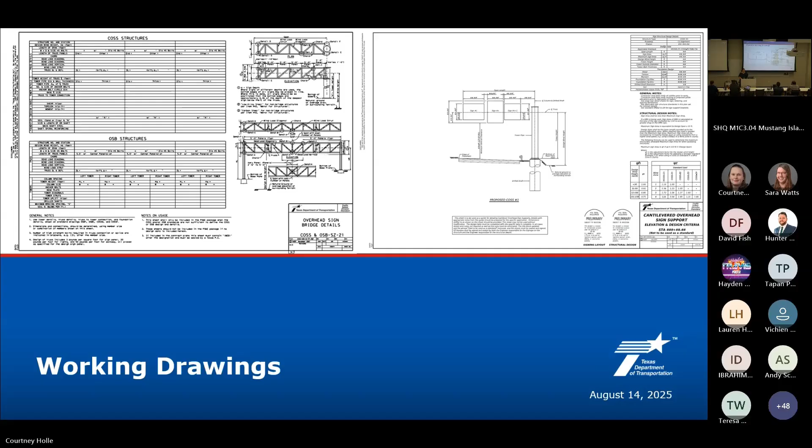So, these sheets currently, how we have it, is more for when you're using the general standard angle sizes, panel sizes, things like that, but the standards aren't directly applicable, right? The standards are for conventional signs, 10-foot deep design span length. So if you've got a 20-foot tall sign on the very edge of your cantilever, you might be in the sign area realm, but you're going to have more moment because it's all out at the end, right? So we need some awareness of that. When it's not directly applicable to the standards but they're using those details, the SD sheet should be filled in.

And it's not necessarily getting filled in. It's been more of using notes to point the fabricators and the shop drawing people to the tables, for them to interpret what's being used for the truss and what's being used for the column.

Another thing is sometimes these are put in here but they're not signed and sealed. Sometimes they're put in here and the general notes are referring to the standards, so the standards are also put in there. Say you have one sign structure, which is probably not going to happen, but you put in an SD sheet, then you put in the design tables, and your elevation view is pointing to the standard sheets, right?

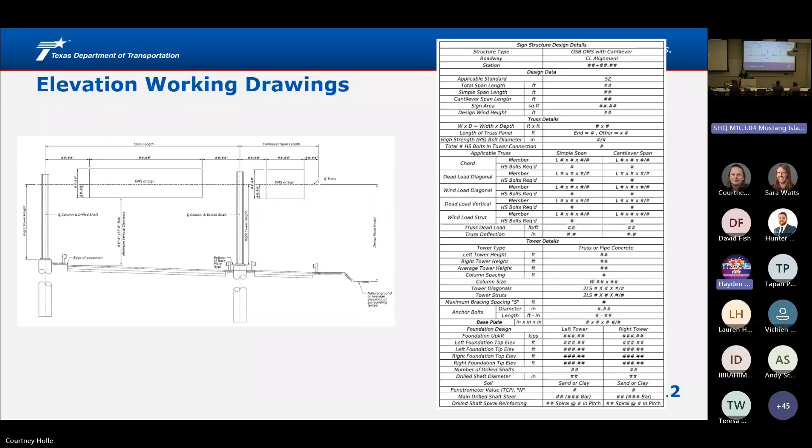We are trying to help you with this, so we're not just saying here's this huge table, fill it out. We are creating spreadsheet tools. Last year we were working together on which standards you need to pull, and as we worked through it, we were trying to put too much into one spreadsheet. So we've gone the route of having one for COSS and one for OSB, and we're starting back with the information or the table.

This spreadsheet, you enter the information and it'll tell you what your maximum area is. It will give you suggestions as to whether or not you should be using that standard, or if that standard is not good—down here it says bad, it turns red. But it gives you the information you need to make the decisions, and then it has a table that you can import into your working drawing. So we're trying to give you guys the tools to make it as easy as we can.

Along with this, we will be incorporating which standards you need back into it. But we had to take a step back and say okay, COSS, OSB—especially with the design parameters, they're two different types of structures. So we are working on that.

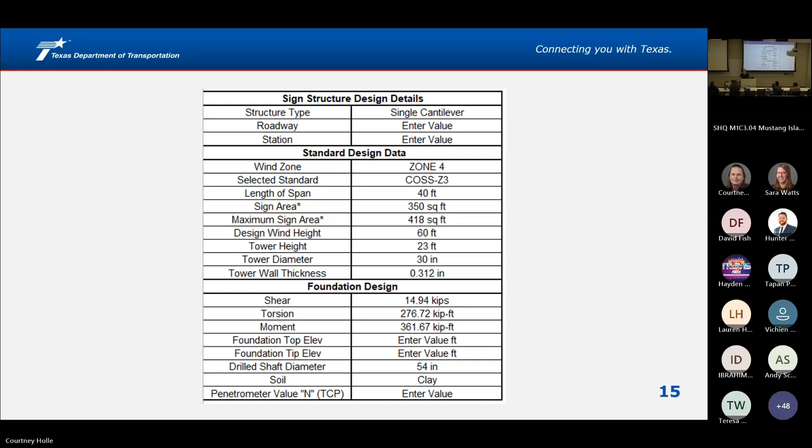So then what else are we doing? Yeah, so I didn't quite get there. This is the working drawing, here's the table, here's the information in it.

Okay, ancillary structure guidance. So the 1990 bridge design manual had ancillary structures in it.

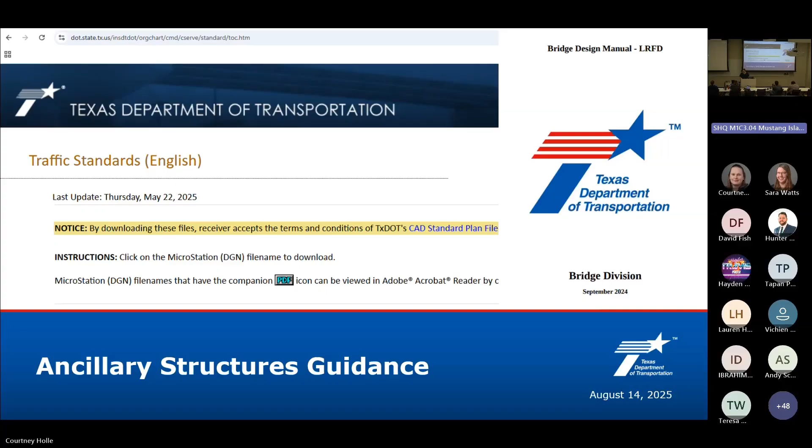We have working drawings that give you an idea of how to use the standards with factors, and then we're going to have official guidance, material properties, and things like that in the bridge division or bridge design manual update we're working on. That will also have the 10th edition AASHTO book, so it's a big update.

Okay, LRFD COSS and OSB updates. This is just a couple snippets from that huge packet I sent. So looking at tower pipes—what diameter pipe, what thickness, what material, what can we get.

Our truss angles—I'm pretty sure there's probably a 5/16 in here. No, it does say 3/16, but you know, the number of bolts. I know there's been discussions on base plate material recently, and discussions on anchor bolt material and stuff like that too. There's been a lot of material discussions recently.

So we want to get some of that stuff, but these design tables are going to be what helps us. We also have them for the OSBs. Again, angles—this is going to be the tower legs.

Now this is something I want to bring up. This is guidance that will be in the bridge design manual when we update it. There is averaging of the tower heights, right? So the tower legs, you have a right and a left. Within reason, you can average them, use the W shape for the average, not a problem. One came through last week where we had a 6-foot leg and a 45-foot leg, and it was averaged, and they used the average.

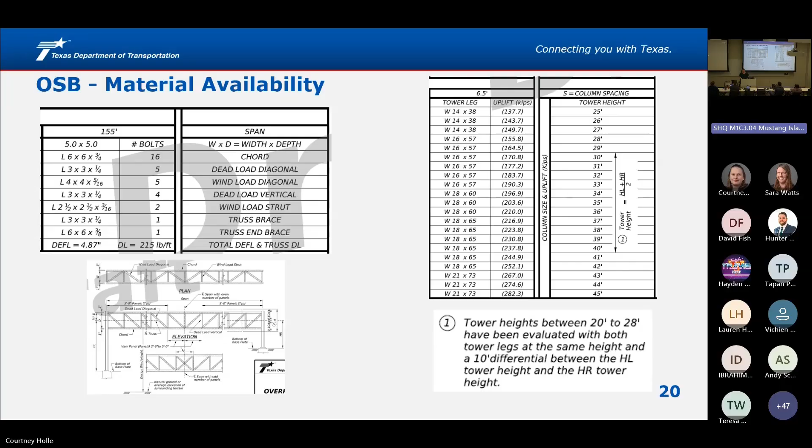So we have a note that we put on as a caveat to the new standards, saying these designs were for a 10-foot differential. So if you have a 20-foot and a 30-foot, average them—use 25-foot. The one I was looking at had a W14 as the average, and a W21 for the 45-foot one. So if you're talking W10 versus 12, or 14 versus 16, you're within reason. But when you need significantly different sizes, engineering judgment plays a part. We do have a disclaimer in all of our standards that says you use them at your own discretion with your own engineering judgment, and make sure it's applicable to your project.

That is my presentation.

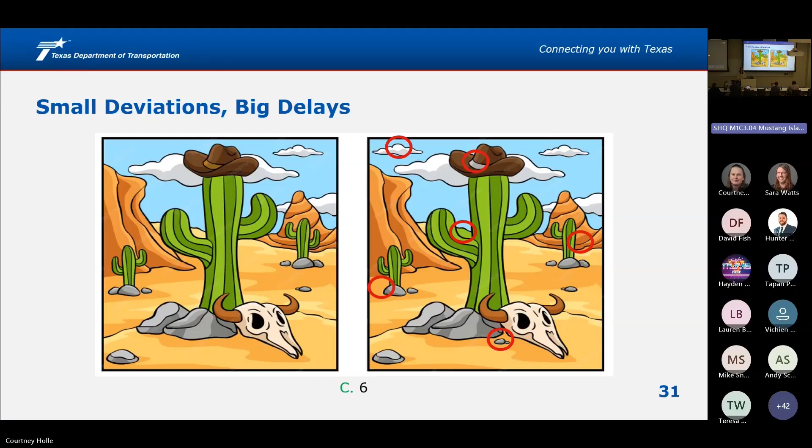Why does that matter? Why did I even bring that up? That's just another example of how little changes can be hard to notice if you're not aware, right? So let's use big clouds and notes and circles and callouts and be very explicit if there's a change, because if I'm reviewing something and halfway through we go, oh, something changed, here's an update—do I want to start from scratch? Probably not. So let's highlight those deviations.

Why are we having deviations?

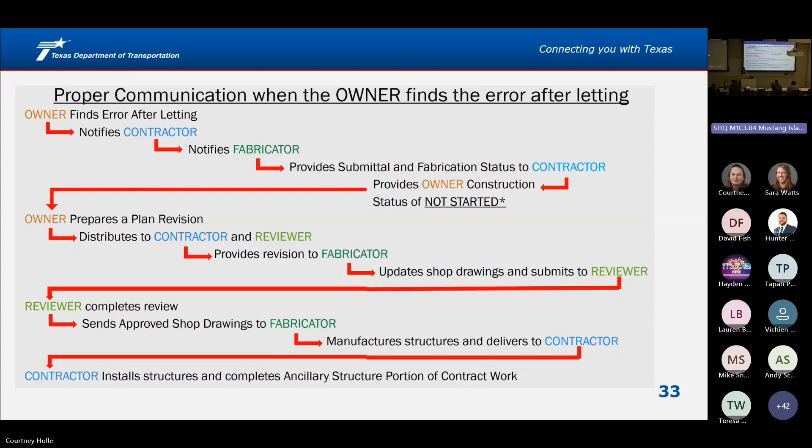Because things don't always go right, I'm not going to go through these since it's the end of the day, but I threw this in here for your reference since you'll have access to these slides. What should I do when something goes wrong? There are a couple different scenarios depending on who finds the error. The main thing to remember is that all 4 parties involved need to know about the error, because if only 2 of them know and plans get changed while the others don't know, we've got a problem. So keep that in mind. If there's a change order or any adjustment, everyone needs to be on the same page about what the plan is going forward. You can study those when a problem pops up and follow that flow chart.

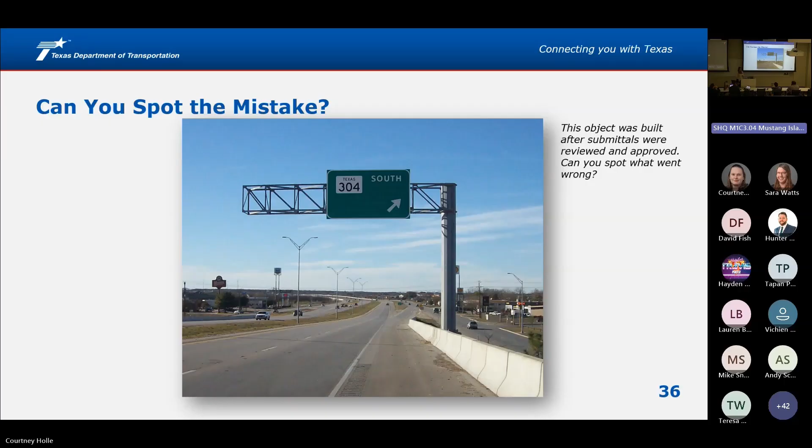Me? All right, we got a couple in agreement there. There you go.

I'll give it 10 minutes to upload to our next one. Maybe, that's real slow. That's all right, we got the main point across. It was probably the animations that threw it off there.

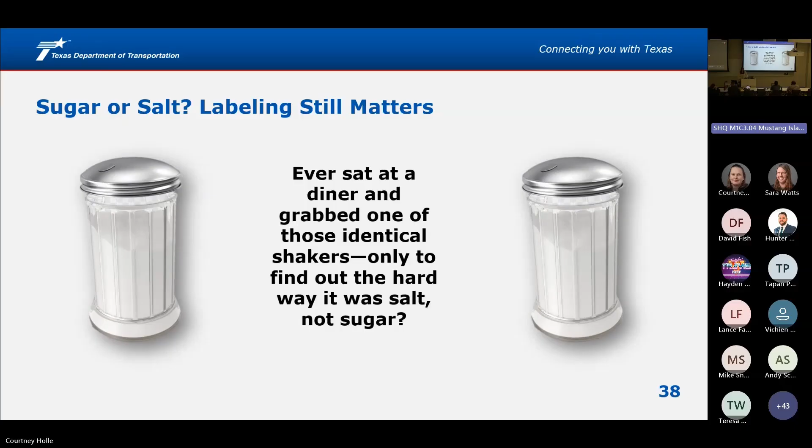Shout out to the shop plan review team for putting these slides together for me - they're very nice. When they said, 'oh, you accidentally grabbed the salt instead of the sugar,' I probably would have written this as: have you ever swapped out the salt and sugar to play a prank on someone? But that's the difference there - we've all been in that situation. You want to add a little sweetness to your coffee, and you have to take a risk when there are 2 identical containers on your table. The point I'm trying to get across is that it matters.

Labels matter. We have big packages, and it might seem like overkill to have all the project information on every sheet, but this is how we stay organized. We talked about double checking details - it's all part of that organization and keeping everything together how you want it. Those are the trivia I have for you guys today. In short, make sure you have good shop plans so they don't get rejected. It has to be buildable, right? Or else it won't. So thank you for putting up with me. We'll probably have a little discussion on shop plan questions, but if you keep your cards and paperclip on the table, we'll clean it up after you all go. So thank you.

So as you can see, she's the better half of the bridge design section - a lot more entertaining over there.

That is all as far as the presentations we have today. Are there any outstanding questions or thoughts that anybody wants to share before we wrap things up? Let's see, anything online? Refresh my Q&A. It looks like it's all audio issues - imagine that, when your Wi-Fi goes out, your audio tends to go out too.